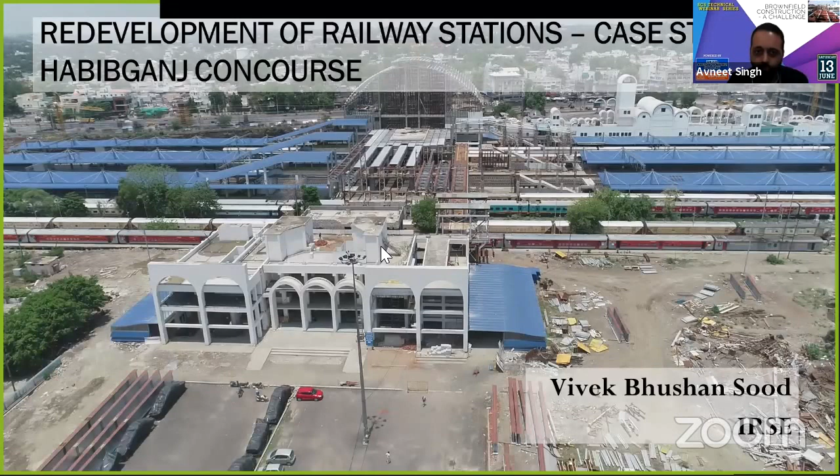Okay, so this is by Santiago Calatrava. He is a world-renowned Spanish architect, and he designs his buildings in the shape of living things, more like birds actually. And what he says is a railway station is something that can generate a city. So mark these words carefully. If it's a grand railway station, a good railway station, the city grows around the railway station. This has happened historically. This is happening now, and this is a very, very important aspect of the planning in the station redevelopment today.

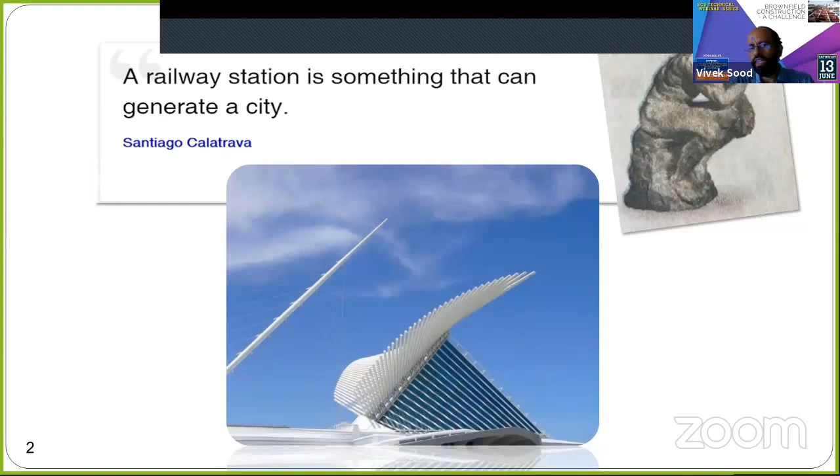Now at IRSDC today, these are the 7 C's which are the focal points. The station has to be well designed to be congestion free. There should be full segregation of the people who are coming and who are going out. It should be convenient. It should be Divyang friendly. Conservation of heritage, conservation of whatever great structures are already constructed. Then it has to be clean. The materials used and the design should be such that the station is a clean station. Communication: people require the signages, signals, announcements. So those should be easy.

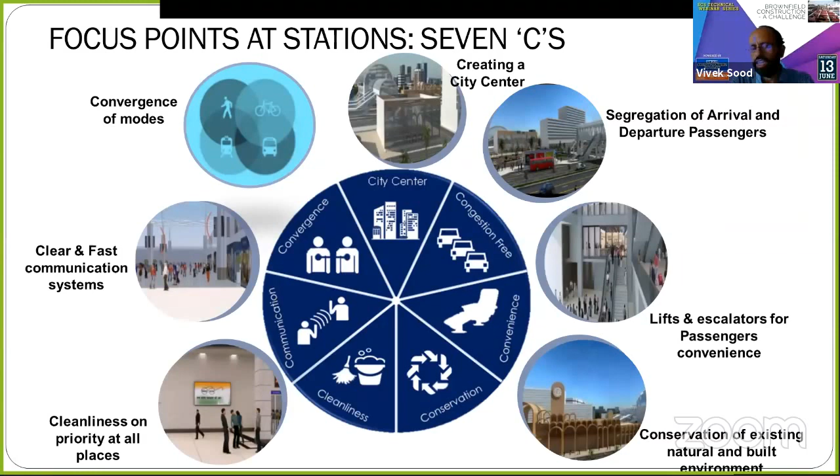Convergence of modes. Actually, a railway station also has maybe buses. It also has the metro. It also has the autos, the taxis, and people may be walking by foot. So it should be converging. All these should be integrated in one unit, so that the station actually starts acting like a city center. A station is a city center, but over the years it has lost that character a bit, and it has to be restored to those glories. So that is the whole purpose of station redevelopment.

Now, what we are trying to do is, there is one component of station and one component of real estate. So the station has to be iconic, it has to have world-class facilities, it has to be self-sustainable. In addition, it has to be a 24/7 city center where people love to come. Then the commercial, whatever work we are doing, has to be integrated with the station. And we do what is called mixed use transit-oriented development. Now, this is very, very important.

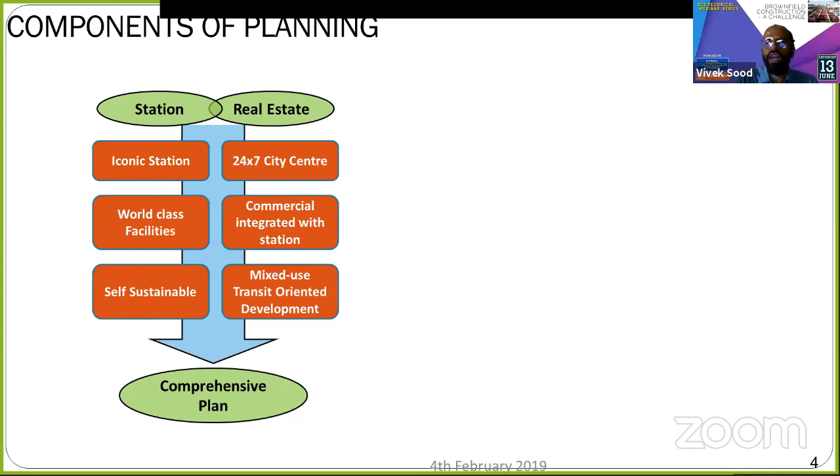This transit-oriented development means that you utilize the trains, the metro, the buses, which can move the people very quickly, very fast, and not increase the load on the existing roads. So the offices, the residences, the hotels, the restaurants should be all in one location itself, so that people can walk to work, people can have their pleasure and all other things at one location itself. And we make a comprehensive plan. So that is the whole idea.

And this is one of the stations that has been designed. And you can see the kind of vocabulary that has been given here. All this green, you can see this green going right through the property and even in the cross direction. Similarly, lots of roads.

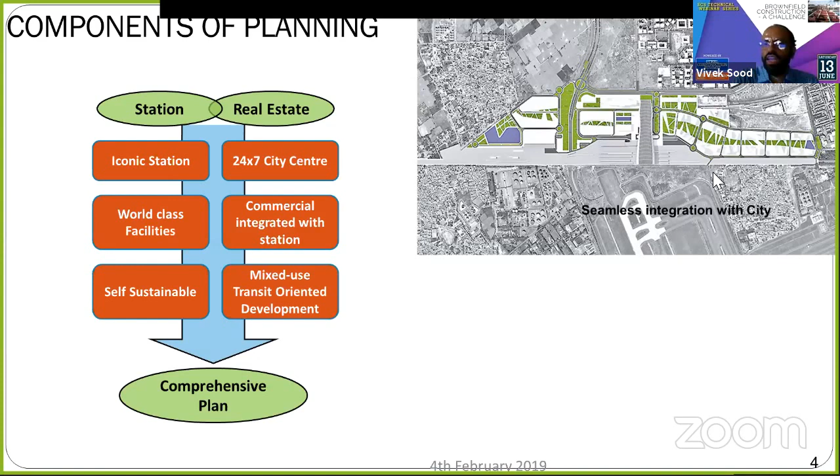So that it is seamlessly integrated with the city. People are able to reach the station without having all this wall of vehicles moving, so that should not happen. And even across the station, all these trains are there, so people should be easily able to move from this side to the other side. So these are the components of planning. All of this has to be planned together.

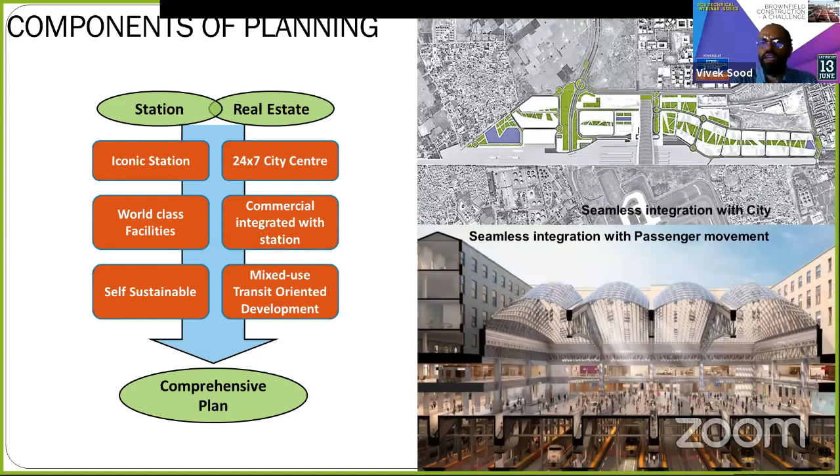And one example of what we are creating is called Railopolis. Railopolis is being constructed, which will be an icon for the city. This red one is the railway station. This is the commercial development, and you can see from here to here, for 1.5 to 2 kilometers, there is no road, which creates these bottlenecks in the city.

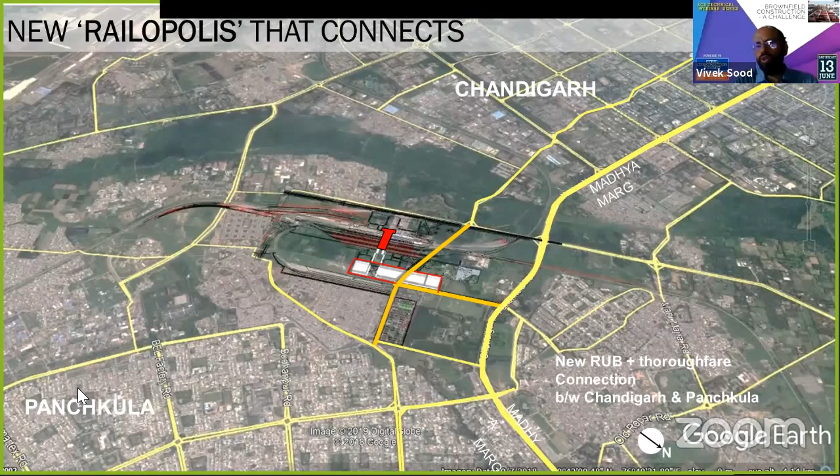So, in addition to making this whole place vibrant, we are creating these additional roads, which will link Chandigarh to Panchkula. And also, this is the new station. This is the commercial, and you can see that the bus routes are also being integrated, so that multimodal integration is possible, and people are happy coming to this railway station. It is easy to reach there.

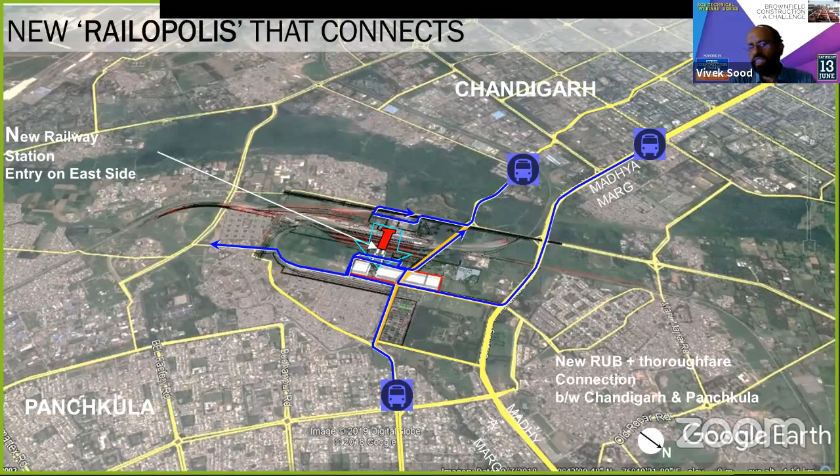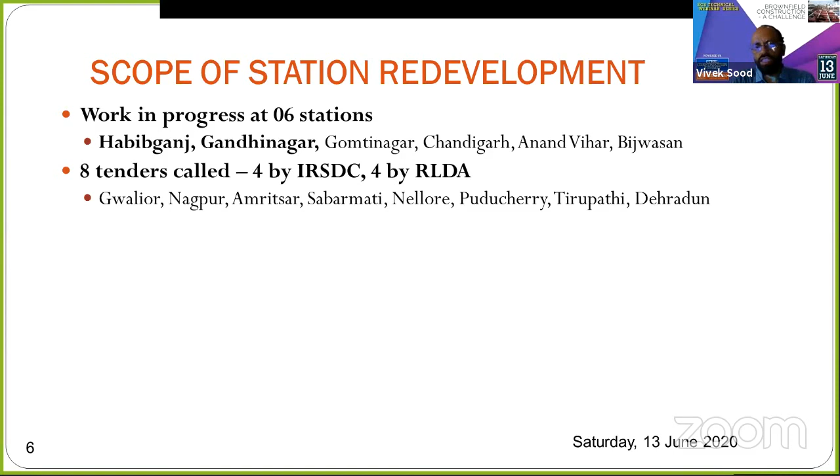Now, already we are working on 6 railway stations, with Habibganj and Gandhinagar going to be commissioned by the end of this year. 8 tenders have been called, 4 by IRSDC, 4 by RLDA. These tenders are live at the moment and going to be opened shortly.

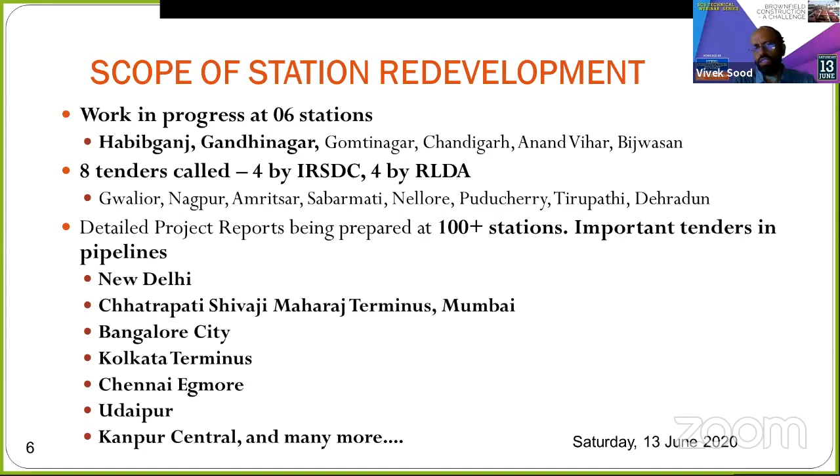Then more than 100 stations, including New Delhi, Chhatrapati Shivaji Maharaj Terminus in Mumbai, Bangalore, Kolkata, Chennai, Udaipur, Kanpur Central, and so many stations. So the work is going on, and there is a target to expedite the calling of tenders. So this is the complete work that we are doing, and just a background of what we are going to discuss.

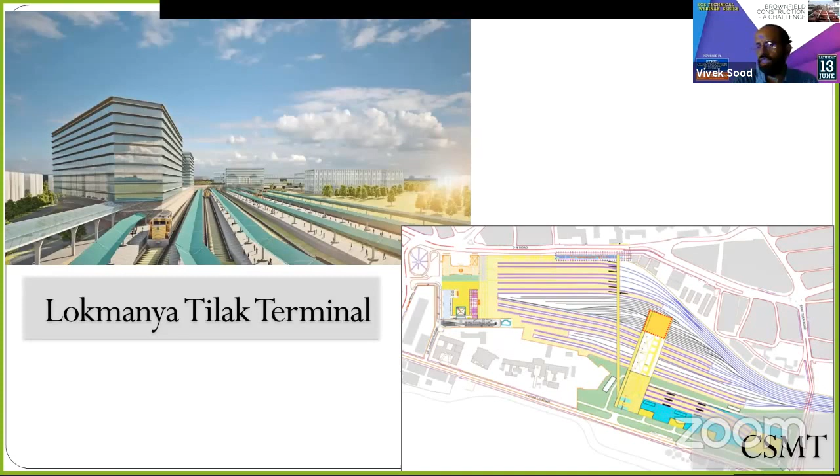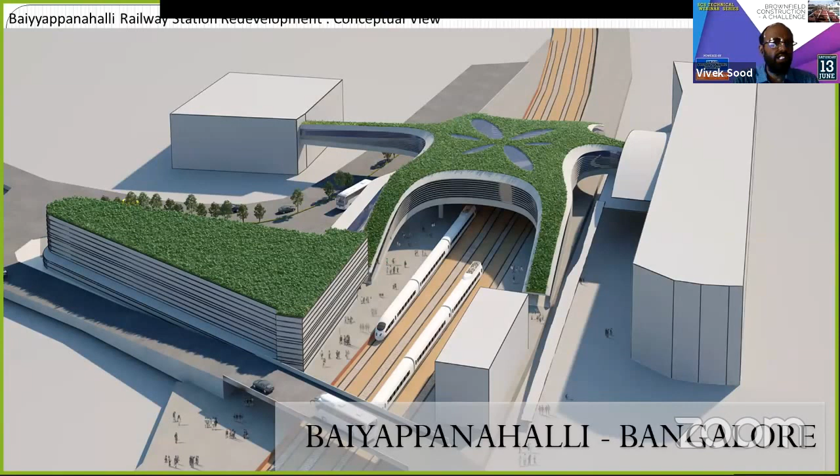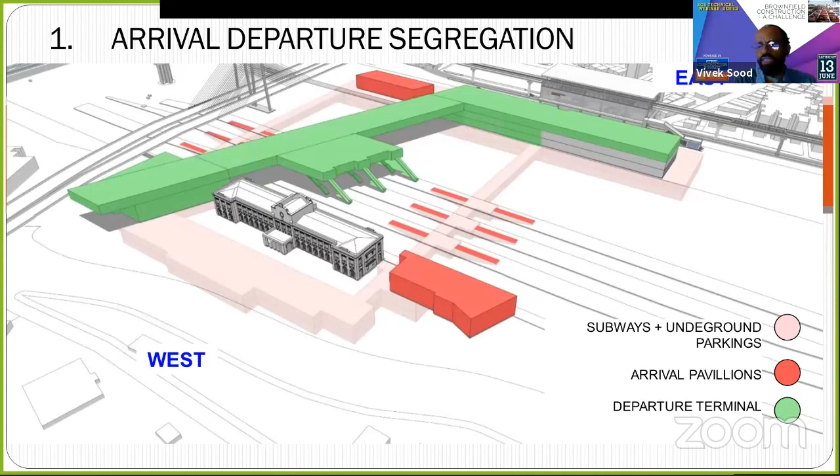Whereas those who come by the train and are in a hurry to go to their places, they come out through these pink areas, and then they just go out, and both these areas are designed with the unique needs of both kinds of passengers because of the mental state they are in.

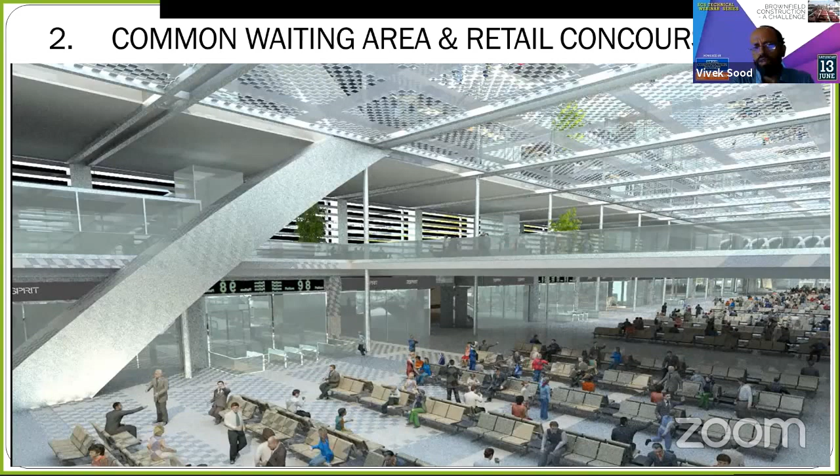And these are the large span roofs that we are attempting, that should span right through the tracks. Look at the height, this is around 4 to 5 meters. This height is 15 to 20 meters. And now this roof integrates this platform with this platform, with this concourse, and it becomes one live comprehensive unit.

And look at the signages. If we have these kinds of signages, these can serve a large number of people, because the clutter is totally removed. So these are the different elements which we are constructing, and steel, of course, is required for all of these. All of these are brownfield constructions right above the tracks, and steel is a very important element of planning.

One of the important elements - yes, we are using composites, and we are leveraging concrete where possible, but steel has a very important role to play. This is Habibganj railway station.

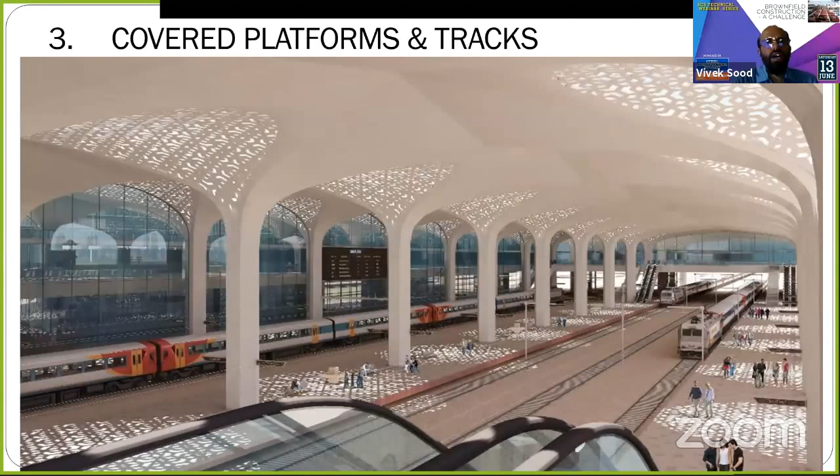People who have gone to Bhopal, Habibganj is in Bhopal, one of the important stations. This is the existing station, and the new station building is coming up. This is the west side station building, there is the east side station building, and this is the concourse.

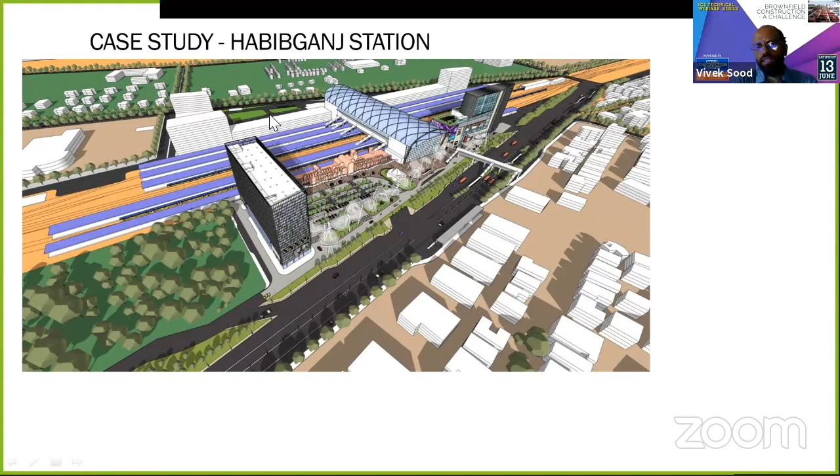Now these black ones are the commercial developments taken up in the first phase. These white ones are the commercial developments which will be taken up in the second phase. And this is the complete arrangement, with major roads on both sides.

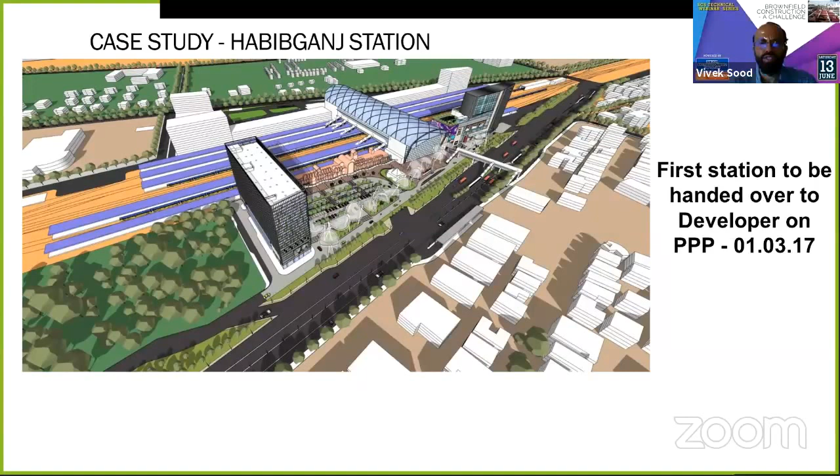So this was the first station in India which was handed over to a private developer on the PPP mode, on 1st of March 2017, and since then the developer has been maintaining this station.

This station development is costing 100 crore rupees, whereas the commercial development is costing 350 crore rupees. Total built up area for commercial which was offered was 12 lakh square feet. So the size of the project is roughly 500 crores - a mid-sized project as far as station redevelopment is concerned.

Some of the projects like New Delhi and CSMT are going to be mega projects of maybe around 4,000 to 5,000 crores worth of total investment. So this station we are going to discuss in a bit more detail.

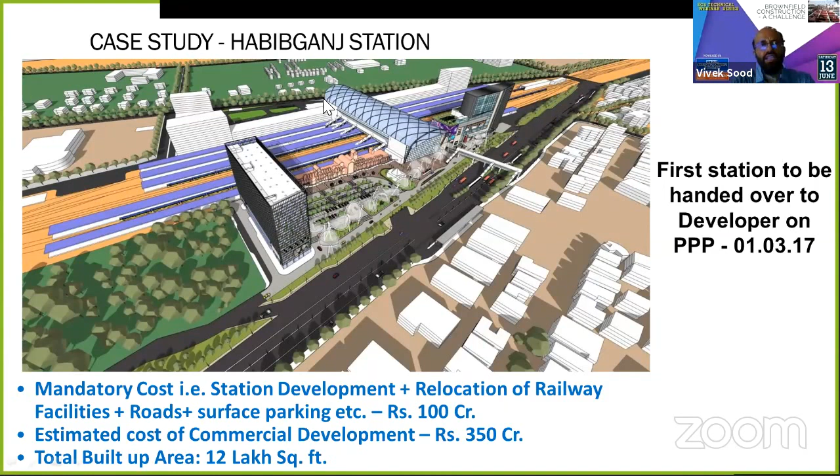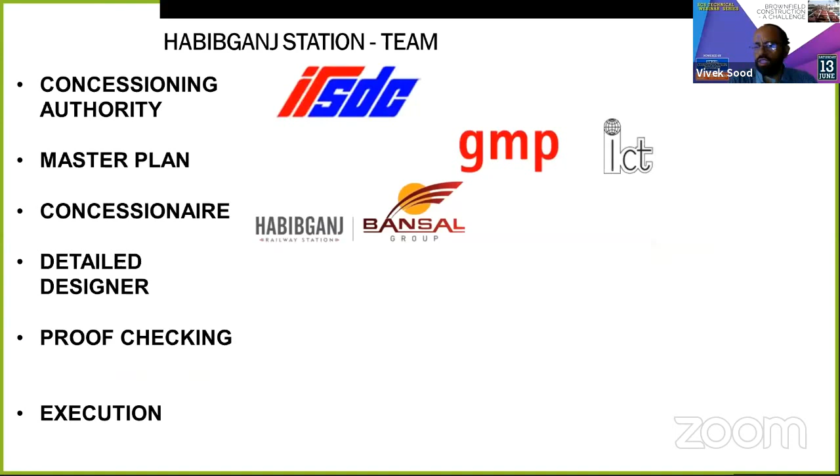So IRSDC was the concessioning authority. The master plan was prepared by GMP from Germany, and ICT were their consortium partner. Concessionaire is the Bansal Pathways Habibganj Private Limited. The detailed design is done by AECOM. Proof checking is done by Sterling for structures and Pankaj Dharkar Associates for MEP.

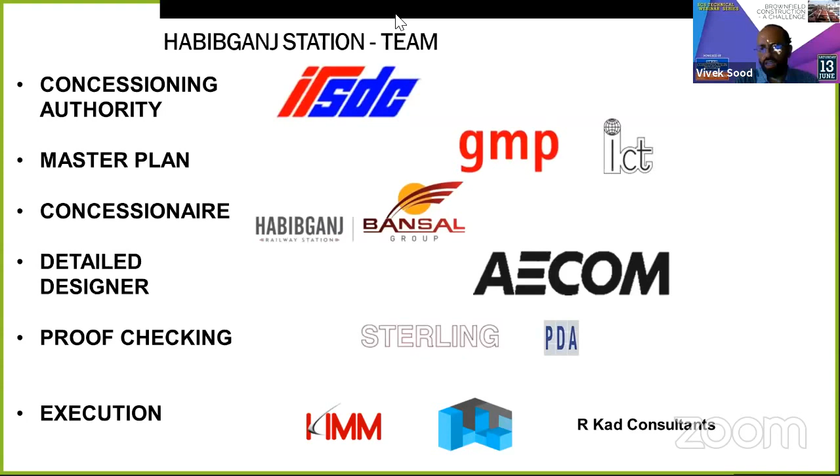Execution is by KMM Infra from Ambala, who did the fabrication. Texture Technologies did the design of the launching scheme, and R Kad Consultants did the execution of the launching, which is the case study today.

So this is how the Habibganj railway station looks like when we took this over, and lots of lines you can see - these are the two main lines. This is on the Delhi Chennai main route, and trains like Rajdhani, Duronto, all these trains pass over this along with goods trains.

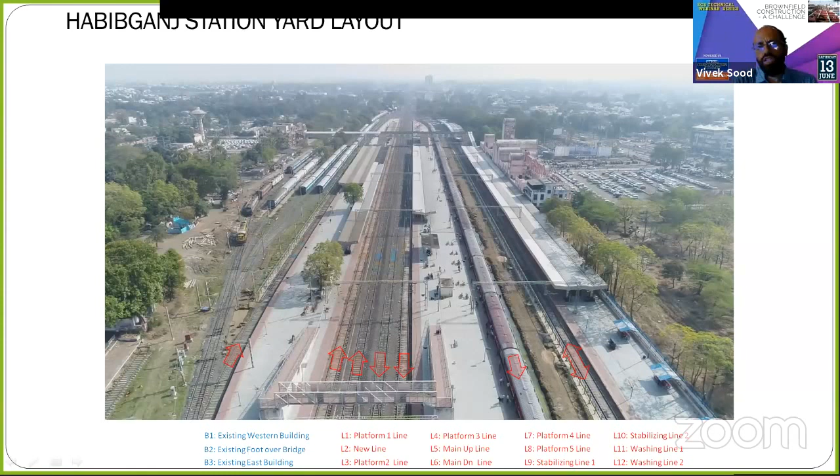We have got 150 plus trains moving every day. So this is the west side building that I showed in the previous slide, and this is the east side, and there was one FOB and another FOB, two FOBs were there. So this is a big yard, 12 lines are there, and this is what we have now visualized this as.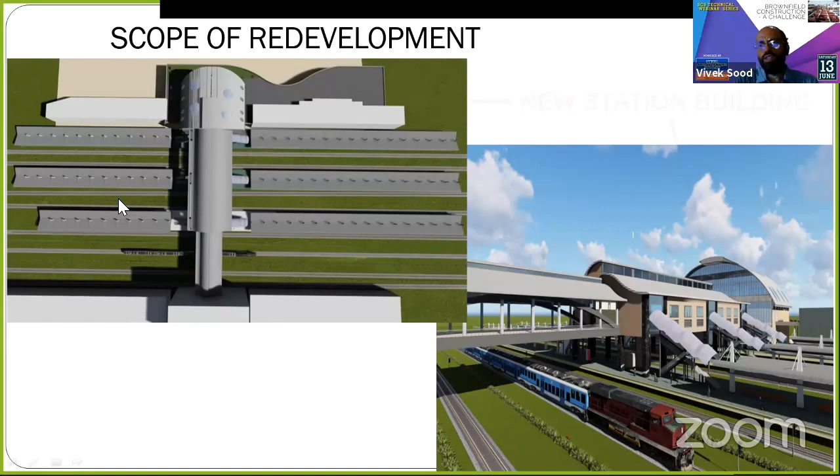Same thing, you can see this is the existing building, a new building. This is the east side building, concourse, and then this - you can see the new station building, then the new concourse, and then refurbishment of all the platforms is also the scope of the work.

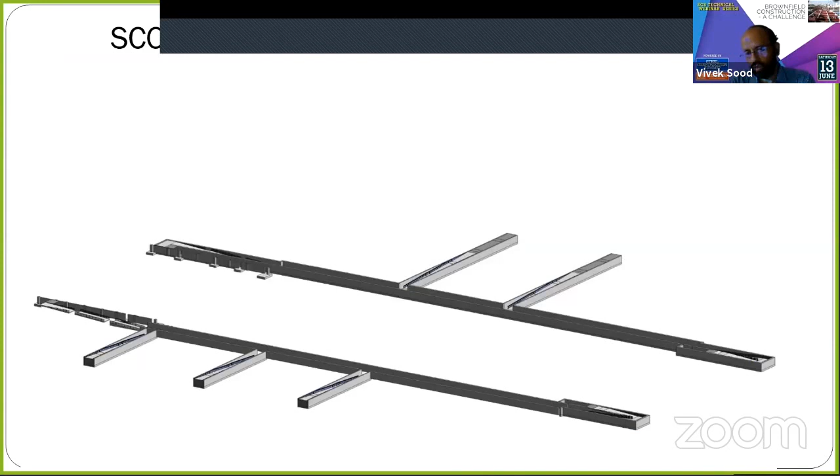What you can see in this image is the two subways. These subways are meant for people who are coming by train who have to go out - they quickly take the subway and go out. Whereas people who come to take the train will definitely come a bit early, so this is the waiting area where they will wait till the train is announced.

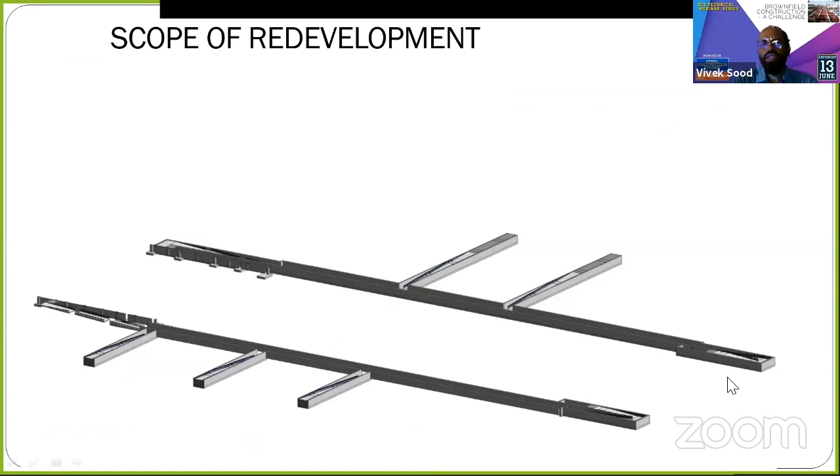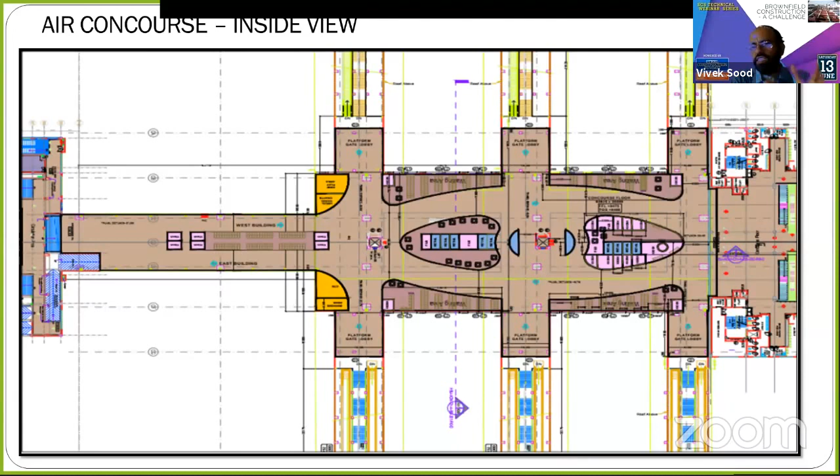All the design has been done as per the crowd handling norms, and there is a manual which we are following. NBC we are following, so that there is no capacity constraint - that there are more people than the space can handle.

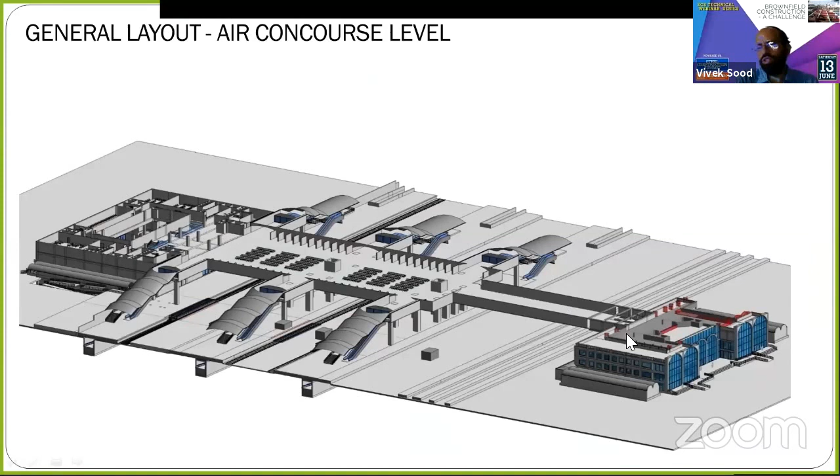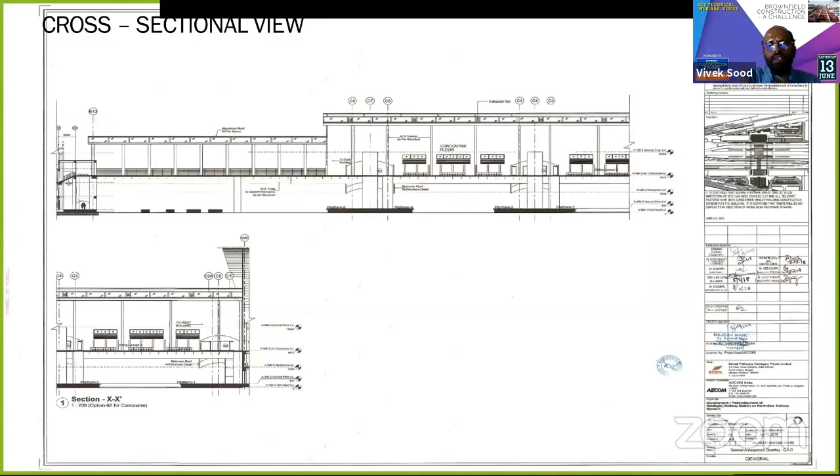And this is how the whole thing will look like once it is ready. If you see the cross section, this is how the cross section looks like, and the plan is what people will be interested in.

I'll give the salient features. So structural details are these: welded steel plate girders with composite RCC slab. Maximum span is 47 meters with a depth of 1750, and look at the weight of the span - 35 tons for a single span.

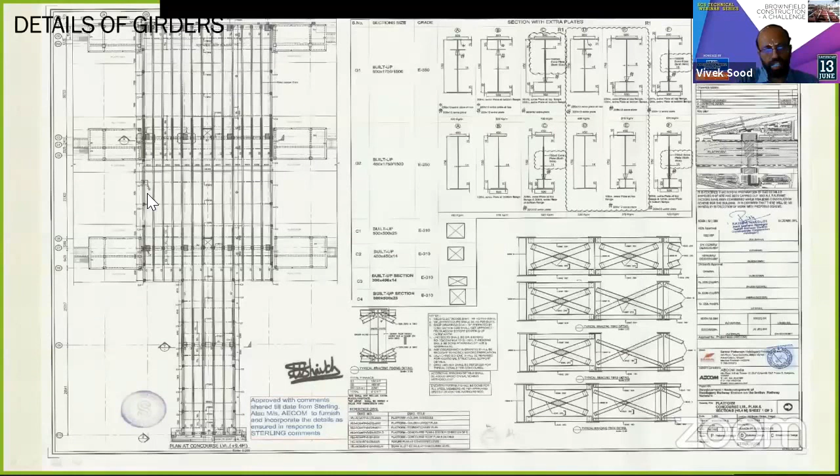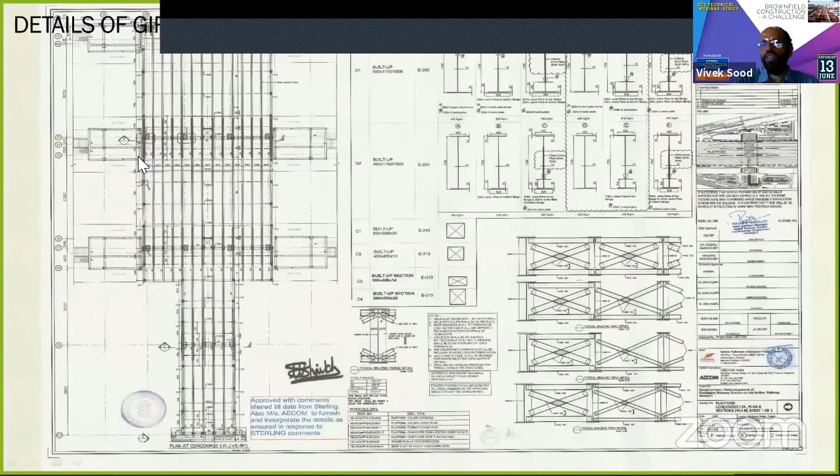If you see this one, from here to here is one span. So 35 tons is the weight, and 46 meters is the length. It is very long, and 35 tons is a very heavy job. So this is what we had to handle and put in place. This was the real challenge actually, which we have already met.

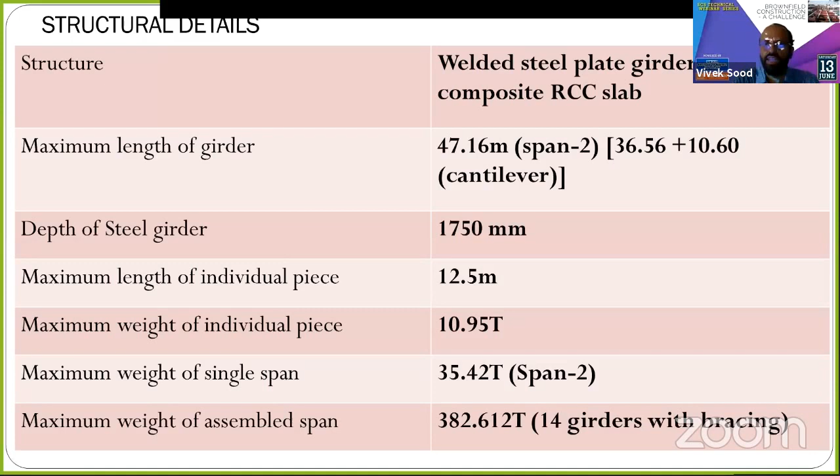A lot of work has been done, as we'll see in the presentation as we go. So what were the options, different options for launching?

One option is that we could have used cranes. You can see a greenfield construction, so cranes are easily available. Instead of one crane, you can use two cranes, and then you can manage the capacity and other constraints. So the launching is very easy, and the trailers can come anywhere. But this is not readily possible when you are working, especially in such a big yard.

So the radius is very long. The weight of the girder, as we saw, is 35 tons. So to handle a 47-meter long girder, the radius will be very high, and cranes of such capacity are very difficult to arrange.

And what we were required to do was construct the subways first, and after that launch the concourse - which means there were more obstructions because of all the ramps that we had to construct for the subways.

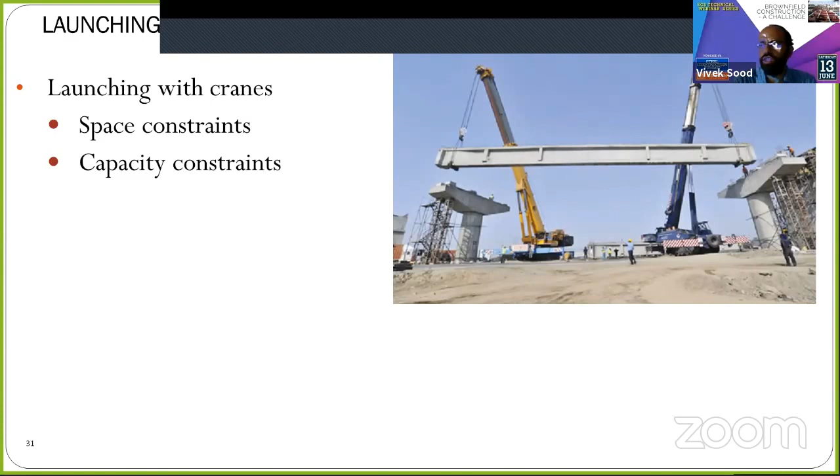So what is the other option? The other option is to launch using a cantilever nose. We could have pulled all the girders using a cantilever nose, and a very serious thought was given to this scheme. The only hitch was that the girders were heavy and the route was busy.

If something untoward happens, the traffic will be stopped, and looking at the weight, it becomes very difficult to restore, and the safeguards required will be very costly for the concessionaire. So this is also one of the constraints - you cannot spend unlimited amounts of money for whatever we are doing.

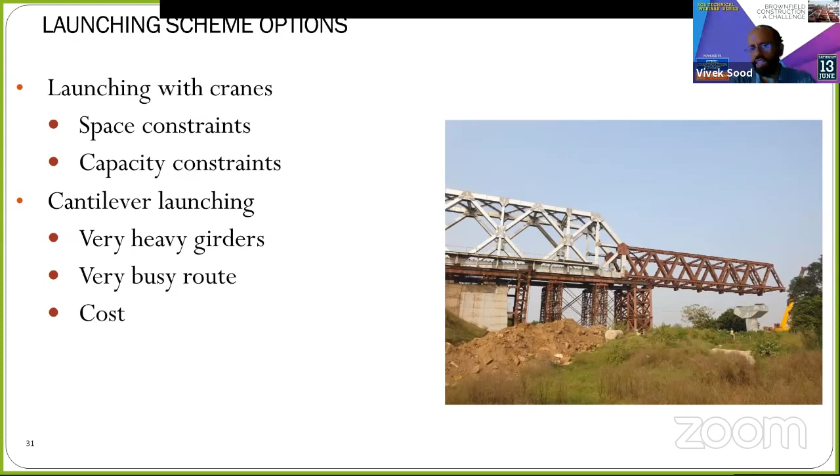So this was it - it was feasible. Launching with cranes was not feasible. Cantilever launching was feasible but was not preferred, and launching platform - this is the generic scheme - launching platform was cost effective.

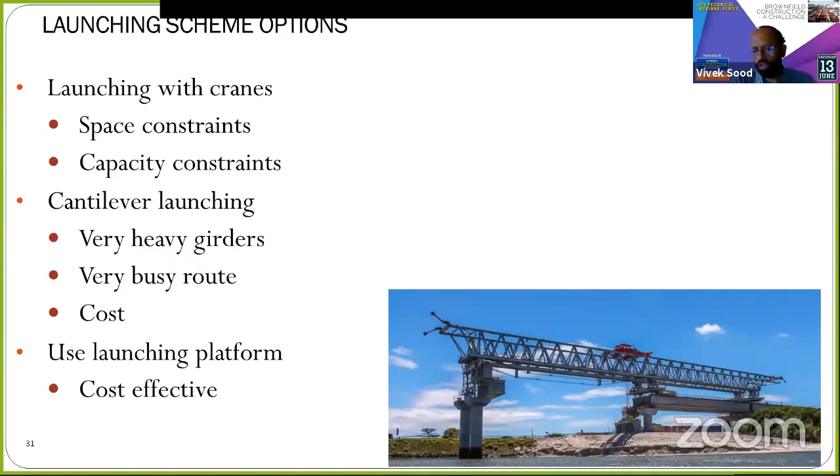And then we worked with this, and came up with a very innovative scheme, so that we can work safely as well as do the work quickly. Now this was the arrangement actually, and this white one, as we are seeing, is the launching platform.

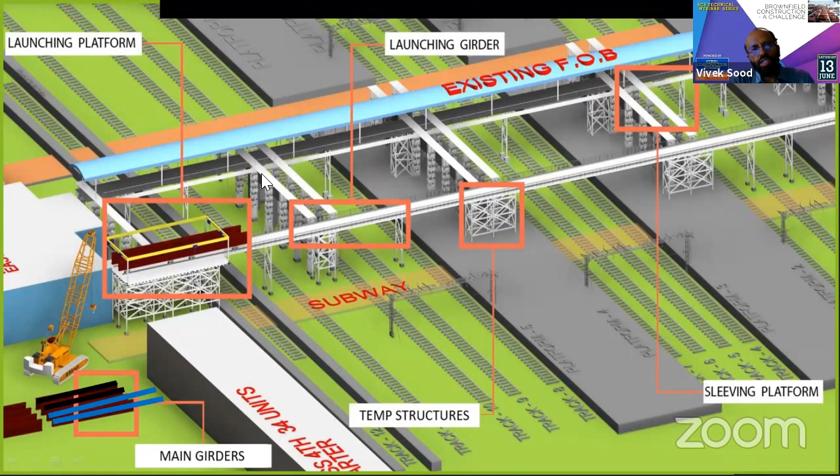You see that parallel to this, this is the location where the concourse will come up, and a launching platform was constructed parallel to it, and the girders were launched using this. It is just an elementary animation.

I'll show a video of this to make it more clear. But just to explain - this is where we had all the girders coming by road, and the cranes could be used here, where we were handling those 12.5 meter pieces which were coming on the trailer and assembling them to make the girders. So this is our girder going up, and then these girders were braced together.

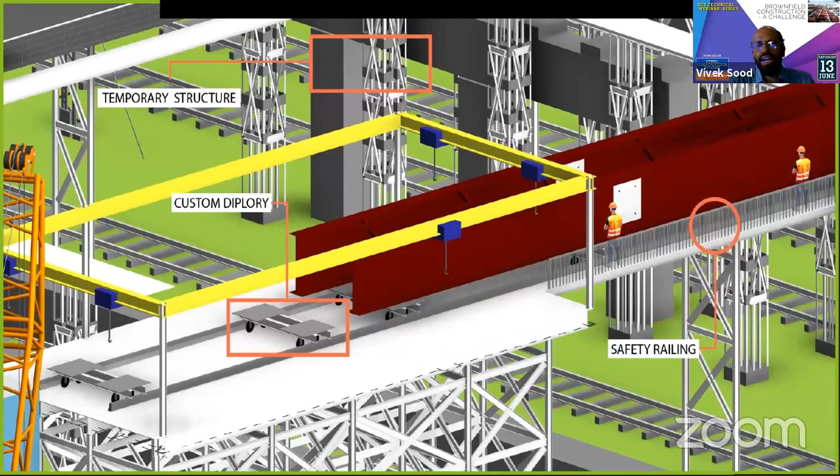A single girder is unstable, as we saw in one of the images, that a single girder can topple. So two were assembled together, and then both were pulled together, so that the chance of toppling is eliminated. You can see this is the assembled girder, and we got these custom dollies. These dollies were used to pull the girder across the tracks, and this is how the girders were pulled. Just an elementary animation.

So the girder will be pulled across the track like this, and after that it will be pulled along the track. The dollies had rotatable wheels, so they were rotated in the other direction, and the same dollies were used to pull the girder in the other direction, something like this. This is the first girder, then the next one, and the next one. This is how the launching was done.

I'll just show this same thing with a video.

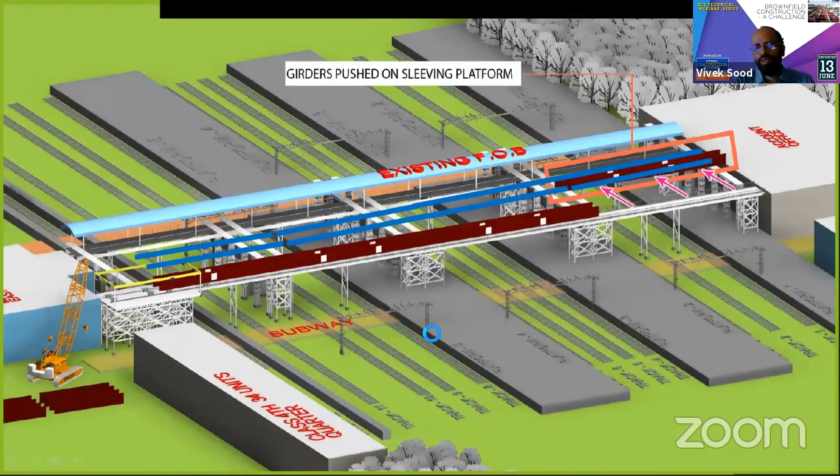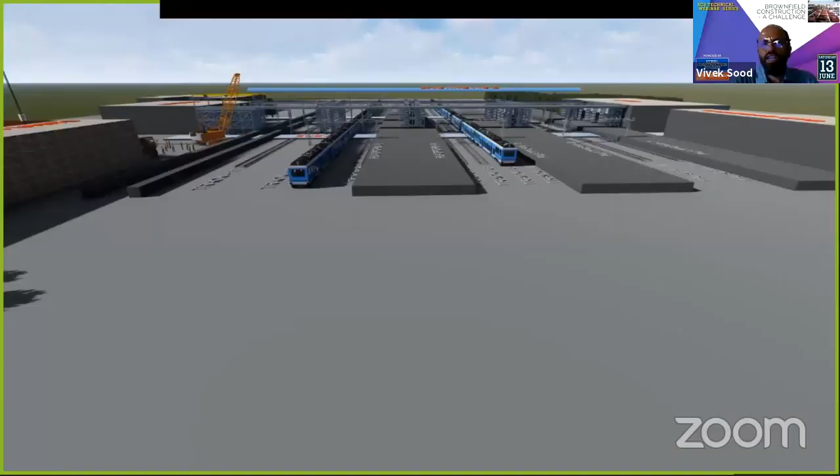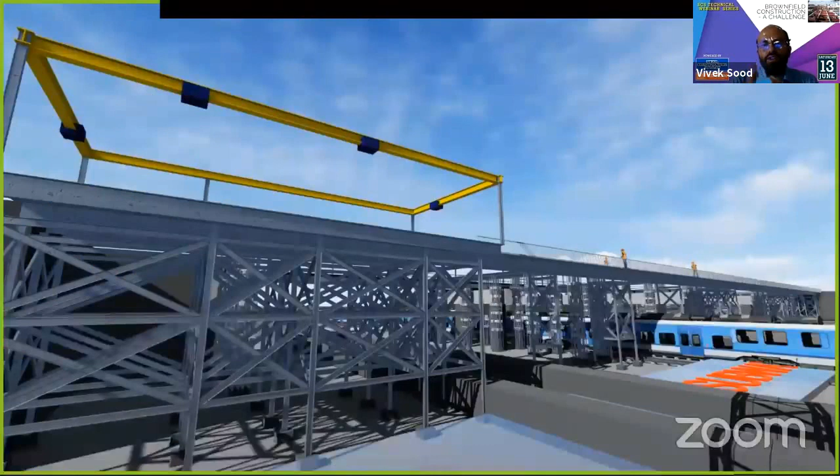There is no sound in this, but this is the yard. On the left side, you have the girders coming from the factory from Ambala. This is the launching platform, prepared with full sheeting, so that there is no chance of anything falling onto the tracks, ensuring safety of the personnel as well as safety of the trains.

So this is a scale model. It is building information modeling. BIM was used, a full scale model, so that the visualization was complete 100%, as I was saying, that you have to visualize your scheme. In this, we could visualize everything the way it was. We'll see the actual photographs, and you'll see the kind of resemblance this model has with the actual photographs at site. There is some simplistic representation - this crane cannot put the girder like this - but apart from that, the resemblance of the actual site to this model was uncanny. You can see this.

So these are the deploys. One girder has been put on the proper location using this gantry. This gantry was used for that.

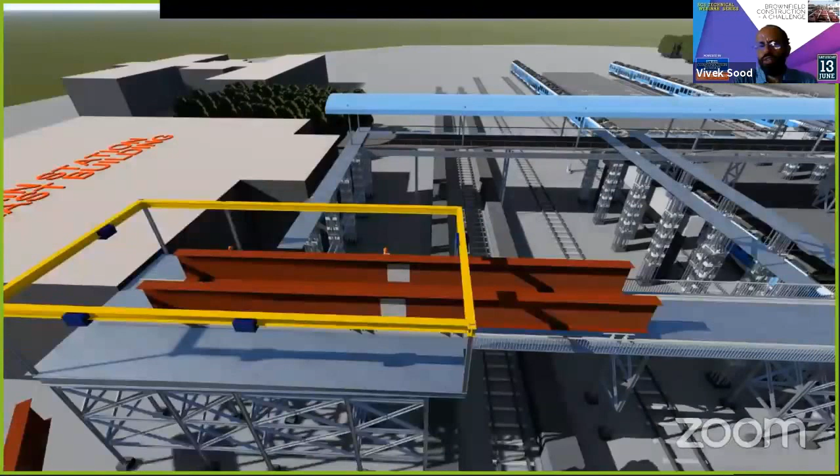So this is the next girder. This girder also placed on the deploy. Currently we are outside the track area, so all this platform work is done outside the track area. This is the second piece. 12.5 meter was the limitation for the transportation, so we have got this splicing, bolted splicing, then bracing, cross bracing, top and bottom bracing were provided, and then the girder is moved.

You can see that now the elements of brownfield have been removed. It is essentially a greenfield construction. We are not really bothered with what is happening below, whether the train is coming or not. This is completely secure and efficient - you can work very fast.

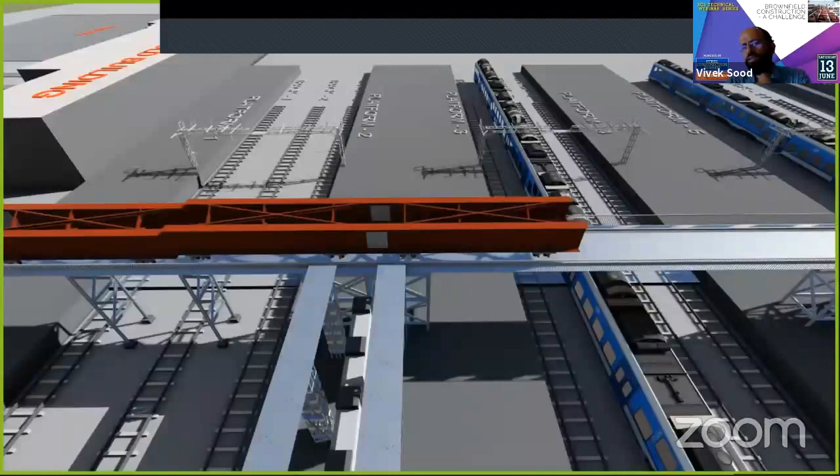So more girders will come. This again is a bit simplistic representation, but essentially this explains the process. After this, once this is done, you can see that these girders will be pulled along the track, and then they will come in place. We'll see the photographs where this will be more clear.

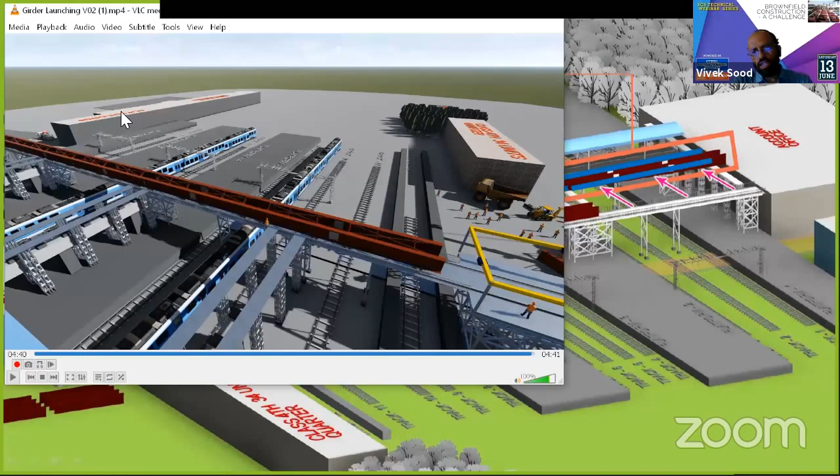Okay, so this was done. This was the BIM design, and it's not just a representation, but also used for design. So it is the visual representation as well as design done on the same model, so that there is no difference where the visual rendering is done in a different software and design is done in a different software - it may be two totally different things, and there may be mistakes because of that.

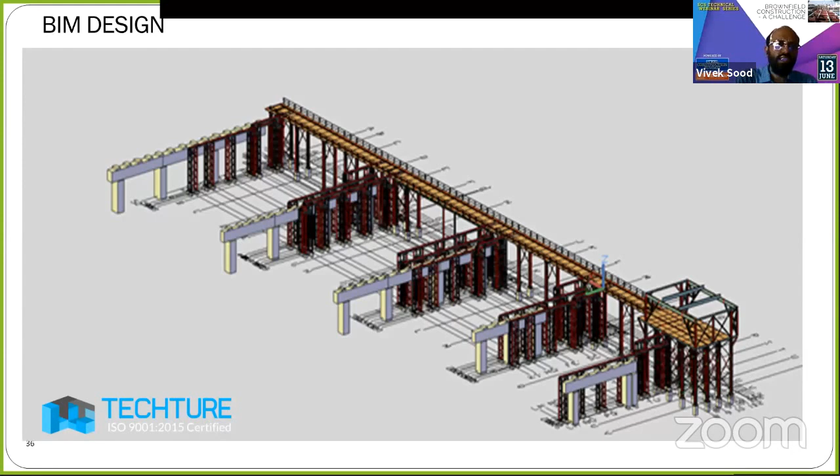This is a beam being launched, and if the block is not available during day, then you work during night. You can see that the work is going on during night with lights and all. Depending on whether you want to shut down the trains, you have to work whenever there is a margin between the trains.

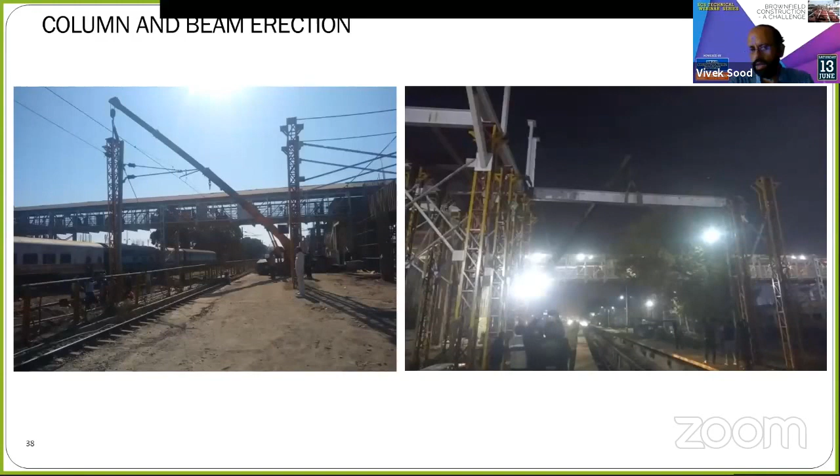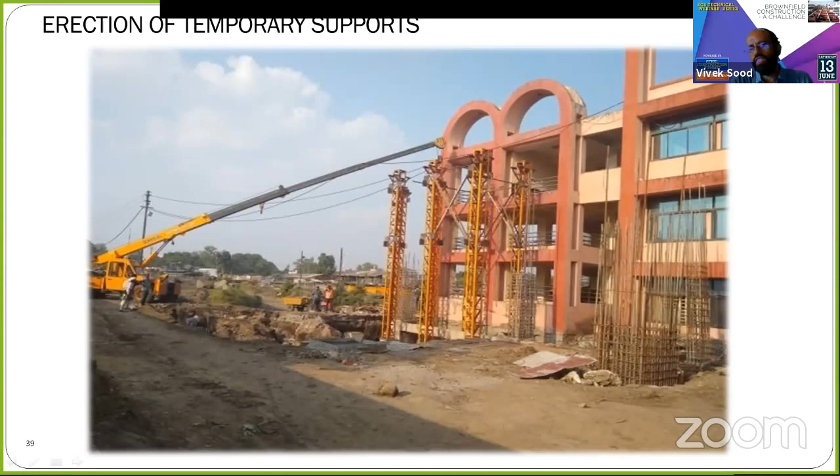You can see there is a trestle being erected, and look at the radius at which this crane is working. Because there is a subway underneath, the crane cannot come closer, and this is the reason why these cranes were deemed infeasible. There were too many obstructions, and a crane could not have been positioned such that it can handle that 35-ton load.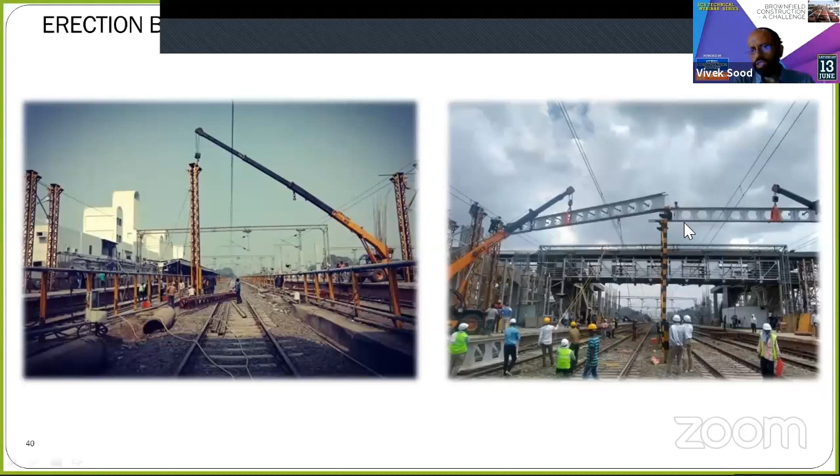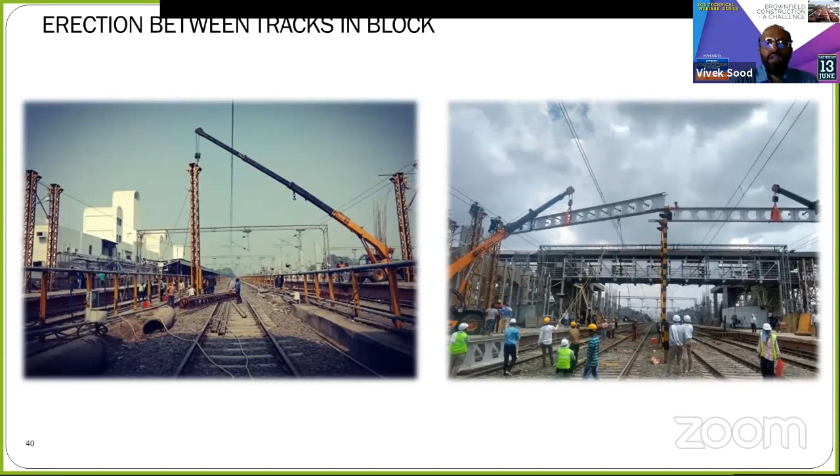So this was the work. Only these columns were in between the tracks, and you have to avoid the schedule of dimensions. This erection work was done. Castellated beams were designed, and this required the block for the main line, and the whole thing was held up because of this, as the blocks were not readily available, where both the mainline tracks were stopped for some time. You can see one of the spans launched, and the arrangement from the top.

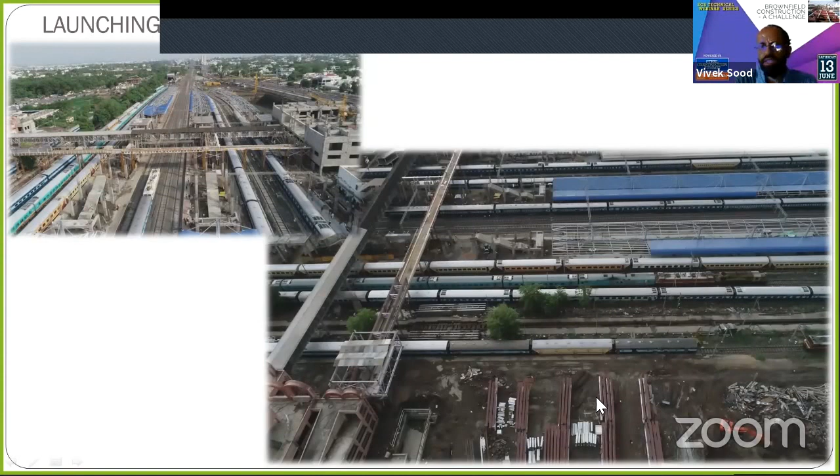And this is the complete arrangement through and through. It is ready, and the platform flooring and other things going on. You can see the girders in the yard which are assembled, and you can see this was the first girder in place. So always we move two girders simultaneously so that there is no chance of toppling. This railing here was collapsible, so you could remove it when the girder is to be slewed. You could remove this railing and pull the girders like this.

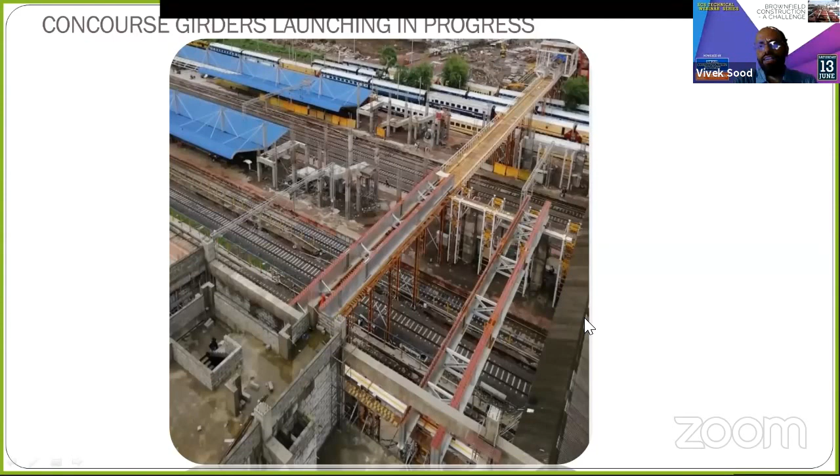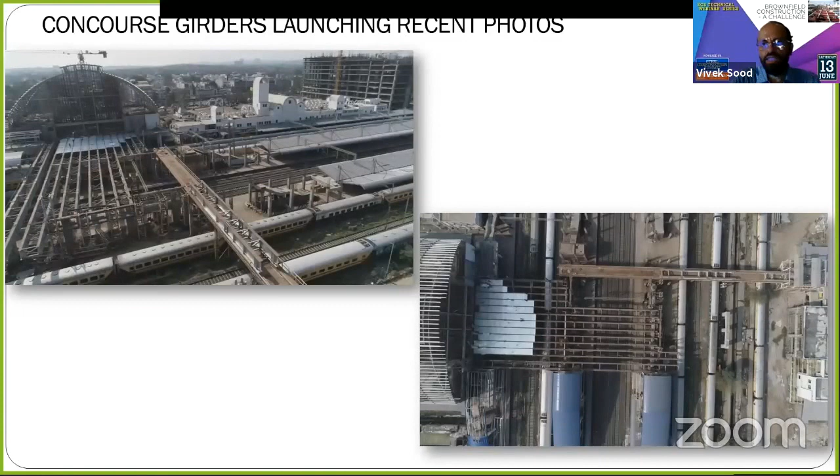And you can see this span is complete. This span is going on. So this is how the work progressed. And these are the deck sheeting provided. So after this, the concrete is to be cast, and the composite action will now start once the deck is cast. And so these are some of the recent photographs. So around 70% work for launching has been done. So balance girders will be launched, and then the flooring will be provided.

And you can see that this was the platform refurbishment work. This is over. This is where the subways were coming out. So this is also over. This dome is in position. For this building, the dome is to be constructed. Once the flooring is cast, this dome will also start. So we are hoping that most of the work is already done actually. So by end of the year, we'll present this to the nation at Habibganj.

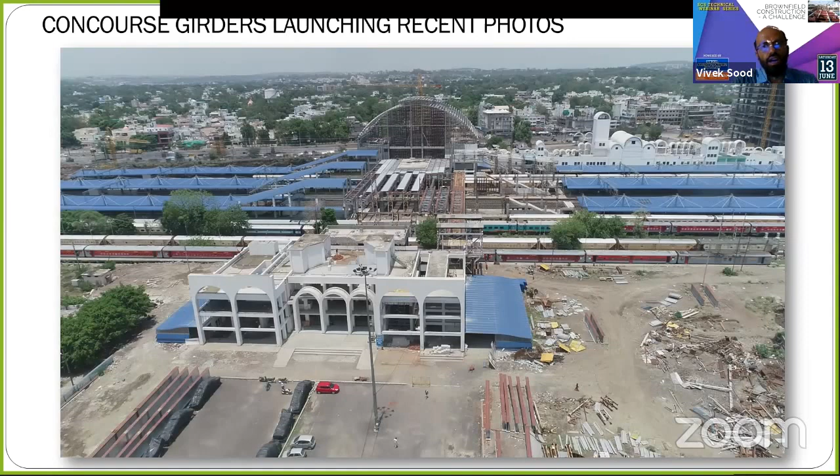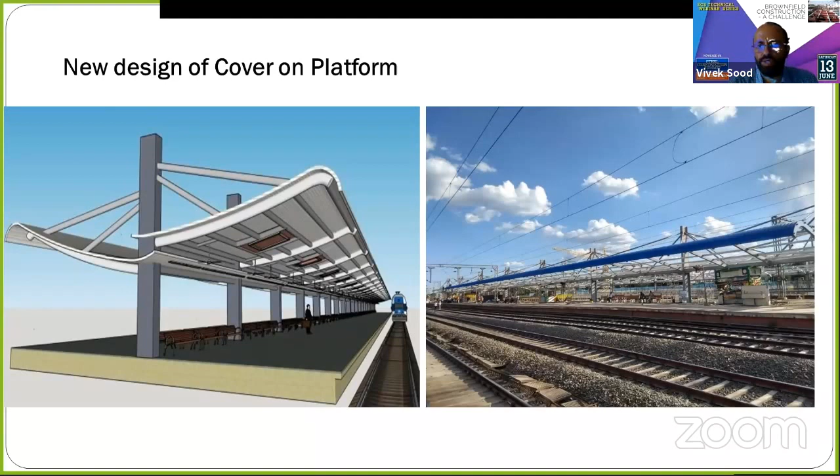Habibganj has many innovations. How the subways were constructed, this cover on the platform is also a unique design. So maybe some other lecture will cover the features of this and what was the thought process and how we handled various challenges, technical challenges for this.

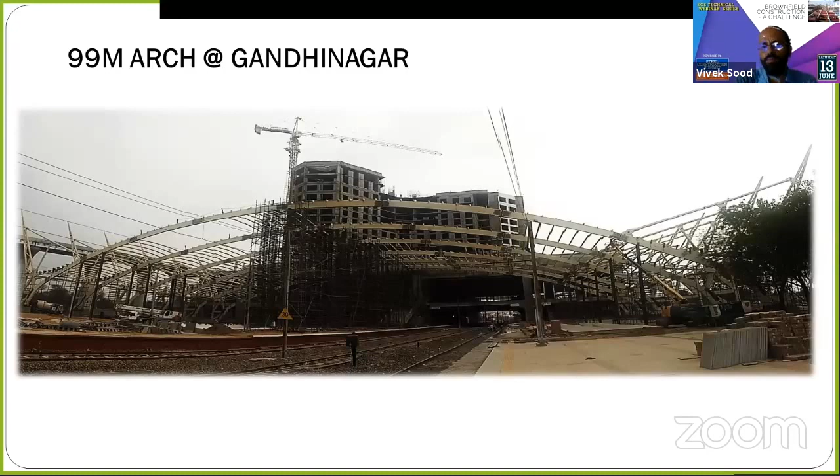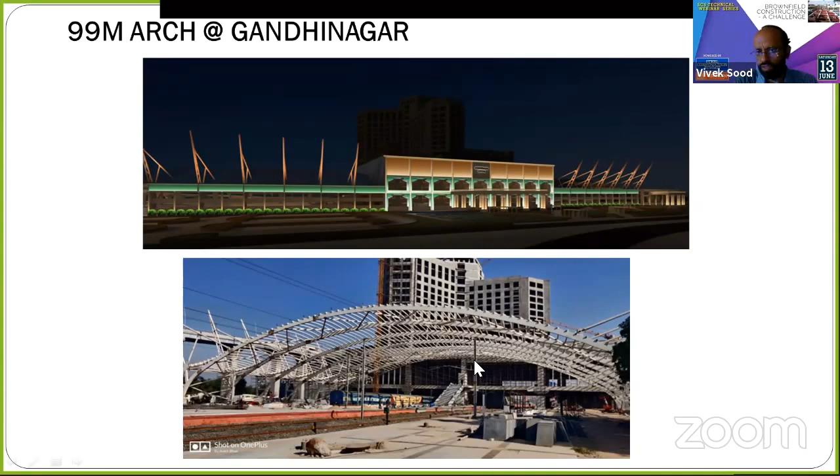We saw one image for Gwalior earlier. This we are providing at Amritsar also. We are planning some such arrangement, and here this is a very good roof which has already come in place. You can see the hotel. This is a render, of course, but it has already substantially come in place, and only the roofing is pending, which is going to commence very shortly. So this station will also be commissioned by the end of this year. So I come to the end of my presentation.

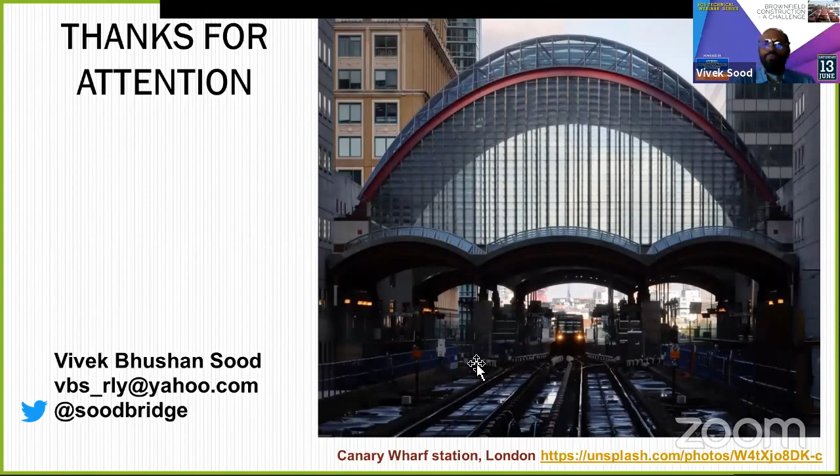Thank you, sir. Indeed, I am too excited to see all your endeavors and the type of things which are happening in railways. Surprisingly, things are not on the surface as yet, but the way the things are being handled, I would say that they are true examples of landmark projects, sir. And like Habibganj, you really had a lot of issues, a lot of teething problems, and from brownfield, railways or airports are so difficult to make, and you have really achieved it, sir.

Thank you very much. First of all, I must congratulate the way these things have been handled and now put into a very professional way. And practically we have understood various large span steel works, how the whole thing works, the methodology, and everything is now absolutely clear to most of us, and probably steel is the material of tomorrow. So that, of course, is apparently visible.

So can we really look into the various questions which are there? One of the questions is, because these are like energy guzzlers, larger infrastructure projects, how do you see that they become net zero, and how do we see that they also essentially become intermodal hubs? And one more question was how the segregation between the arrival and the departure passengers is being done. So these are the first intake, then I will take further questions, sir. So you can just answer these first.